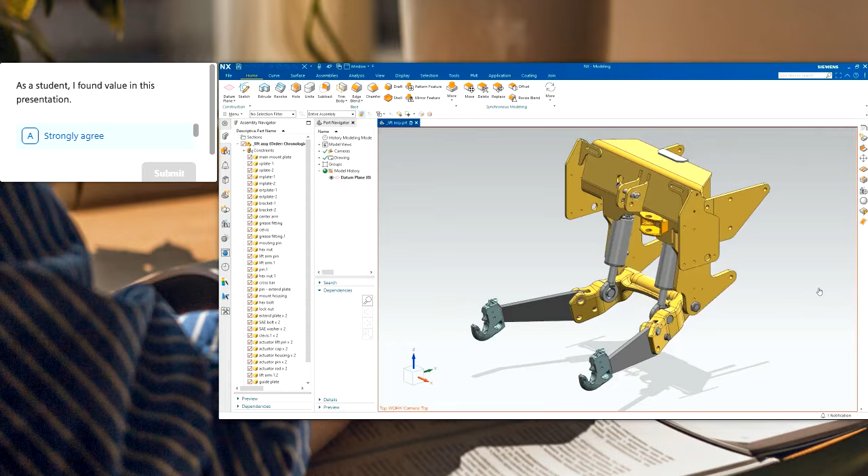This is a demonstration of NX Join on an assembly that's typical of what you might see in the heavy equipment industry. This assembly is going to be put together with a combination of rather large nuts and bolts, and then there are several plates in here that would typically be welded. In here, we're not going to use automotive spot welding type of techniques. Here we have these larger plates that typically would be welded to one another.

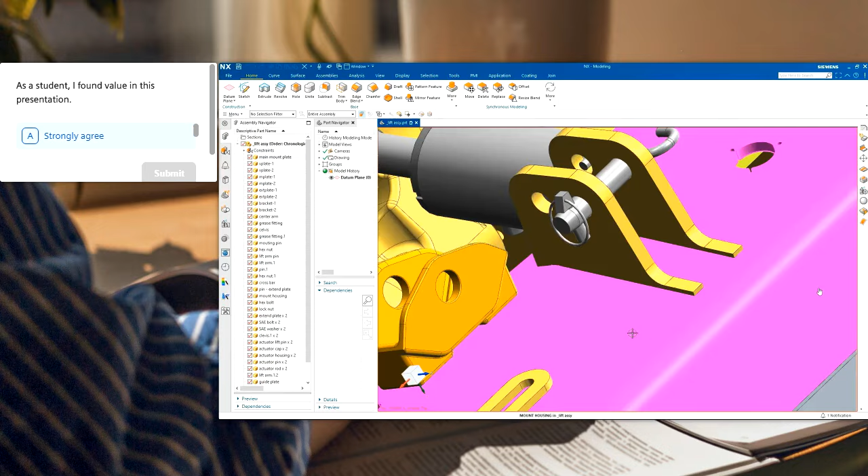I'm actually going to focus on these extend plates here and where they're going to be attached to this mount below it. What I want to do is use a compound welding technique where basically we want to have a fillet weld that goes all the way around the edge here, but behind that there's going to be a bevel weld that's actually going to grind into this part here. And we'll look at the definition of that, how we might want to alter the geometry of the original plate so that there's room for the weld material to go in, and then how we annotate that.

So I'll start by defining the bevel weld that's going to cut under here. So we'll go into Join, go to the groove weld command, and the type we want to use is the bevel groove weld. So you can see here, we're going to keep the root opening. We're not going to have a root on this. We basically just want to get that 45-degree angle cutting in underneath there, and we're going to go 3 millimeters deep with our weld material.

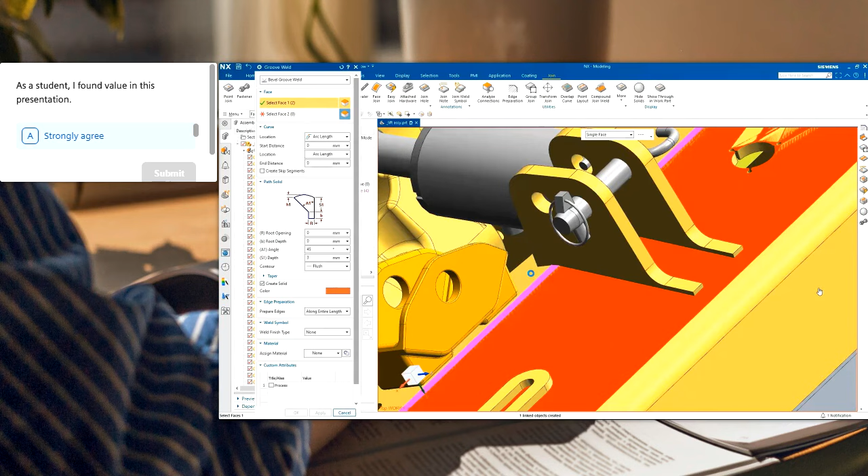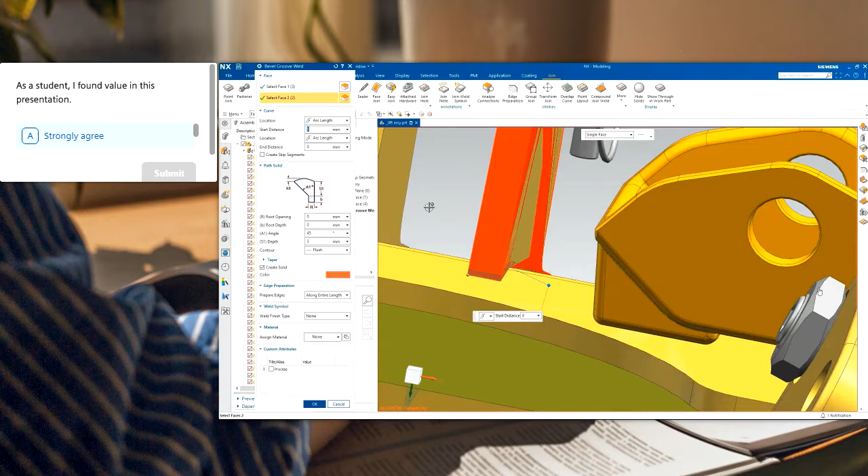So the way we'll do that, we'll start by selecting a few faces on the mount where basically it's going to attach, and then we can kind of work our way around. And you'll notice that when I start selecting the faces on the extend plate, you start to see a curve forming, and we'll have that continue around to here. I clicked too quick. Let's go back to that, and I just want to extend face set 2 to include over here as well. Okay, so you can see now we've got a curve that's going to go all the way around. Find our weld.

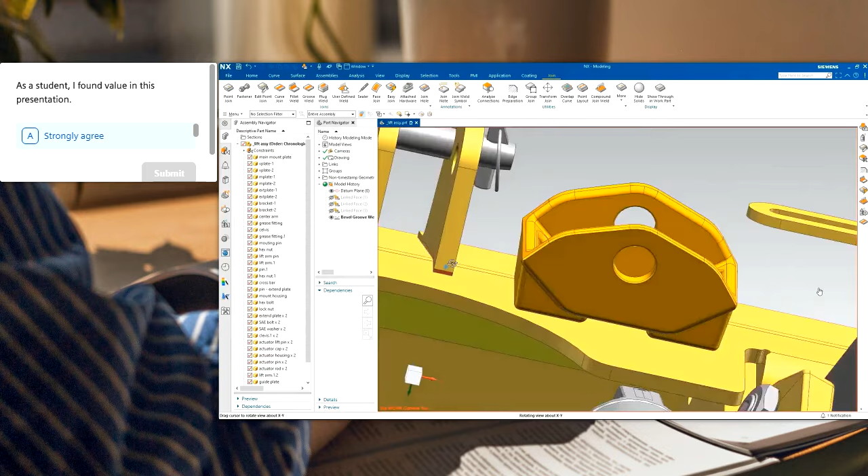I can also assign a material here. I'm just going to grab steel and assign that. So we've now defined our welding material, and let's generate that. Okay, so you can see we do have that bevel weld formed. Again, later on, I'm going to do the edge prep, which is basically the grinding of this part to have the geometry match the bevel weld that's going to be placed there.

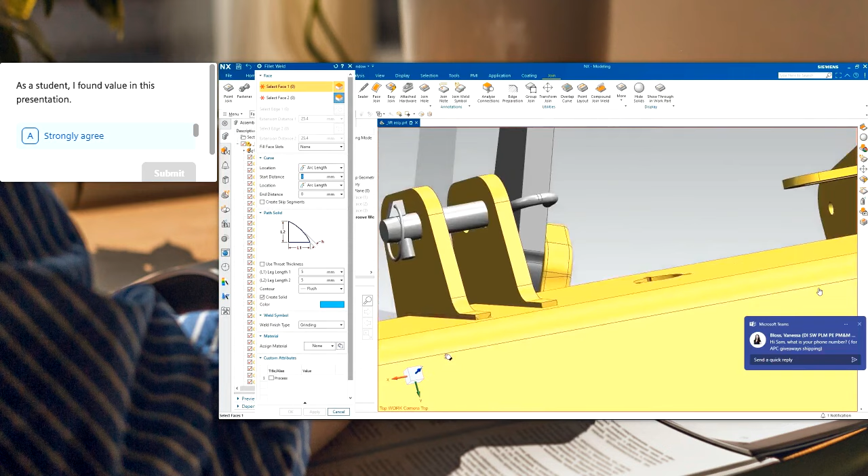All right, so now we're going to put the fillet weld on top and basically repeat that same process, where we'll grab the faces on the main mount first and then work our way around, grabbing the faces on the plate.